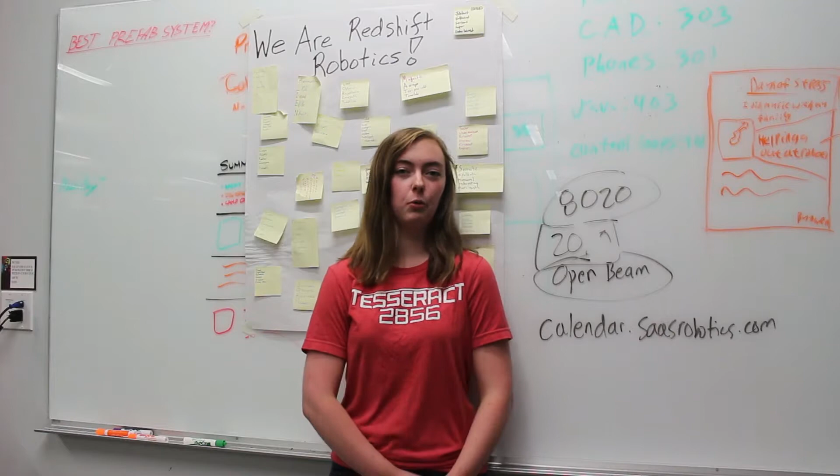This past year, we were the Washington State Champions and Connect Award winners. At West Super Regionals, we were the Motivate Award second place winners, and at the Houston Worlds, we were the Inspire Award finalists. Previously, we made it to Worlds once before, and this last year was our second time at Worlds.

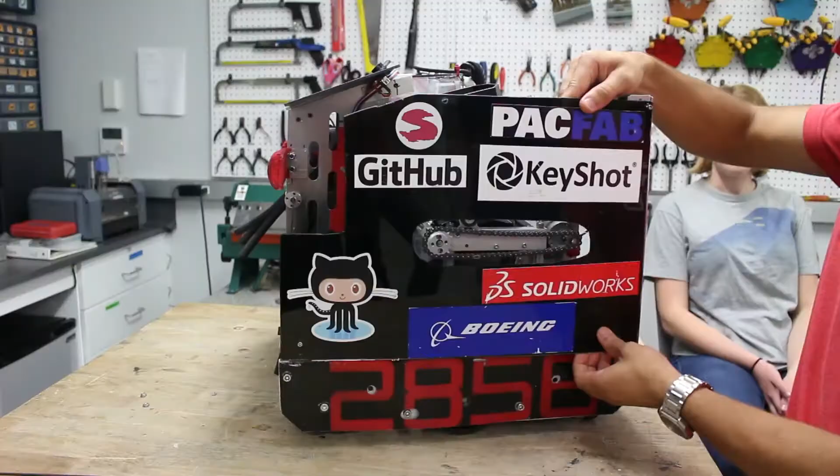Going behind the side panel of the robot, we have a flicking mechanism that is passively fed from the bottom by a second flicker. It's a dual-sided flicker with an adjustable, 3D printed adjustable guide mechanism.

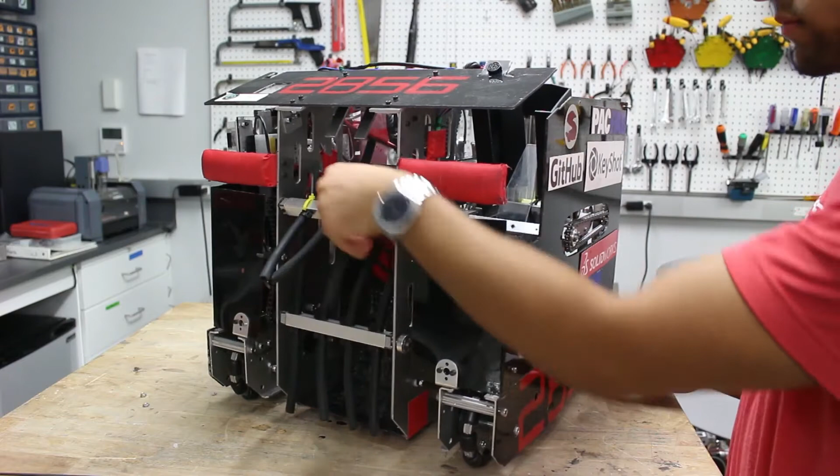Our collection mechanism is two pieces of aluminum square tubing with high-rigidity surgical tubing through them. Our electronics panel has a 3D printed phone mount on a piece of custom bent and shaped polycarbonate, which fits between two pieces of 80/20 aluminum rail, allowing it to slide off and reveal our electronics for easy access beneath.

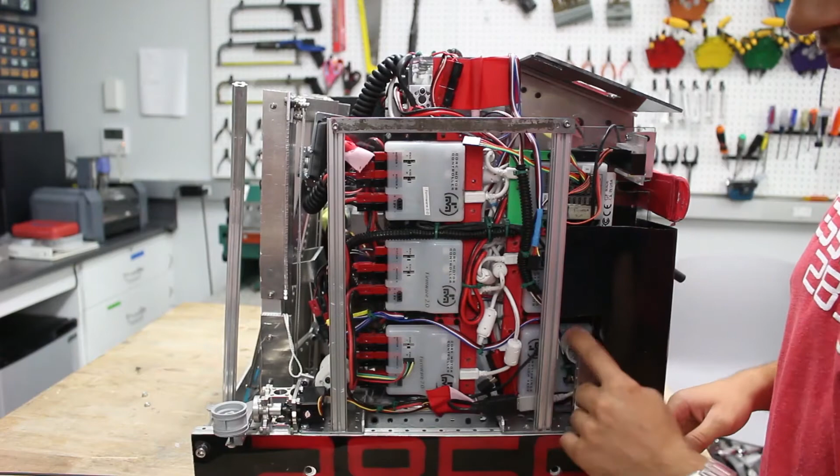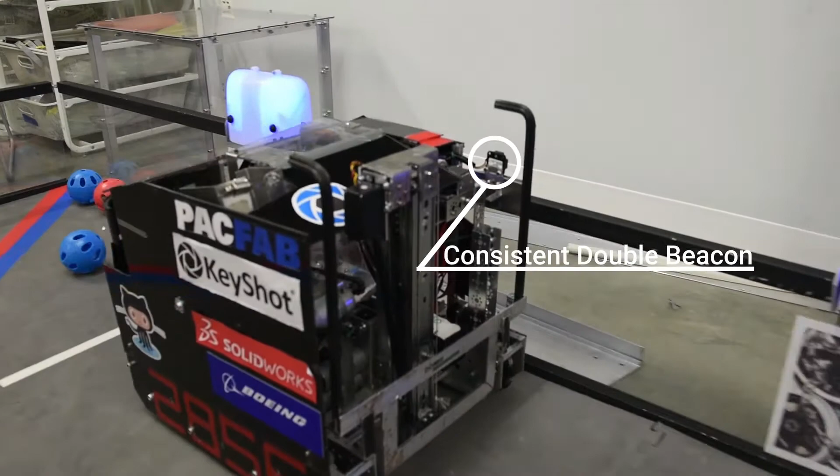On the sides, we have wheels that flip down. This aids us in our alignment with the wall during autonomous, during which we use a combination of these wheels and a PID algorithm that keeps us pressed against the wall at all times, even if we drift away for a small amount of time. With the combination of these two things, it allows us to stay consistently aligned with the wall.

In the rear, we have a cap ball mechanism, made out of Misumi slides attached together with custom aluminum fittings, and two actuated arms that flick out to grab on top of the cap ball.

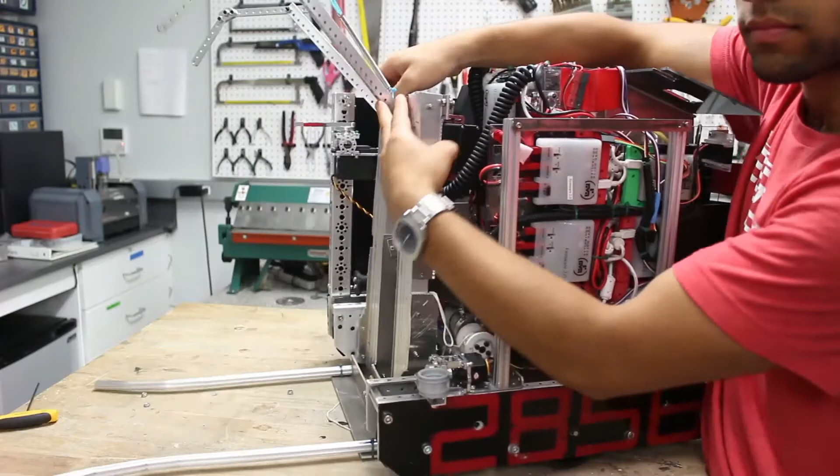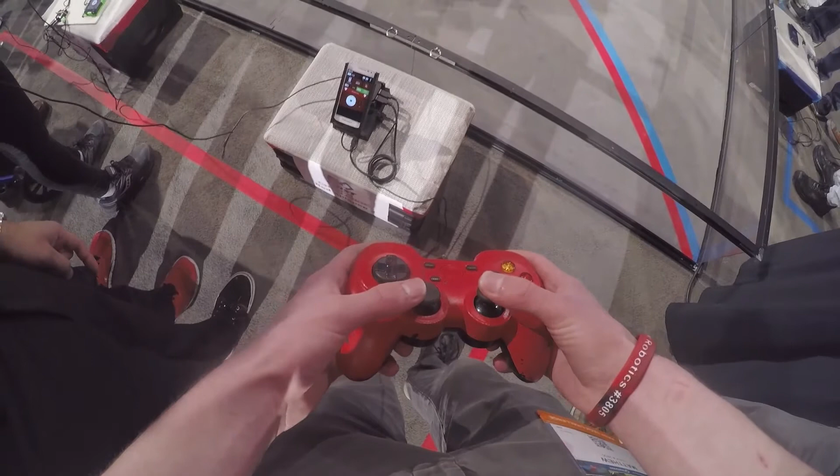Here you can see some in-game footage of it in real life. Of course, when it's powered off, it's a lot less exciting, but you can see it expanding out rather rapidly, grabbing onto the cap ball, and finally lifting it on top of the vortex.

In the front, we have two button pushers on either side of our collection mechanism.

Now, probably the most interesting part of our robot is the passive feeding system. As soon as particles get through the collector, they enter a hopper, which passively drops the particles down. It can hold up to 3 particles, the full 3 allowed. Once in the hopper, those particles pop up and feed through.

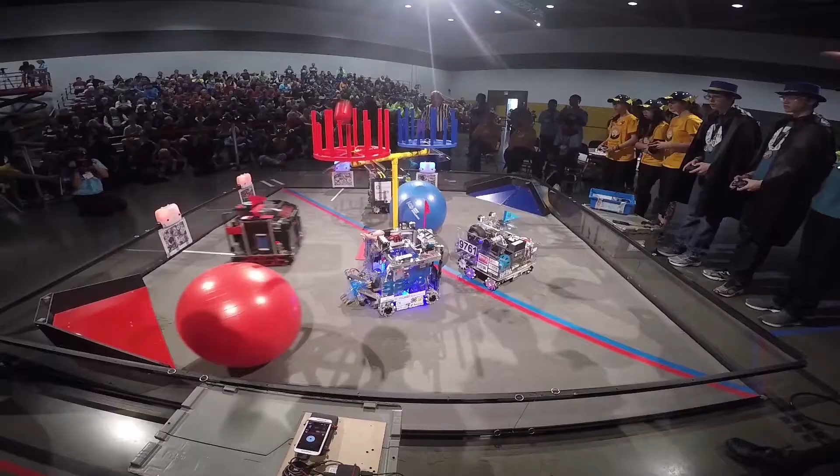As one particle is lifted up by the flicker and loaded in position to flick, the next one slides into place and is brought up by the second flicker, allowing for very fast actuation and rapid fire out of the flicking mechanism, as you can see here. So we get both the benefits of a flicking mechanism in accuracy, as well as speed closer to that of a jugs mechanism.

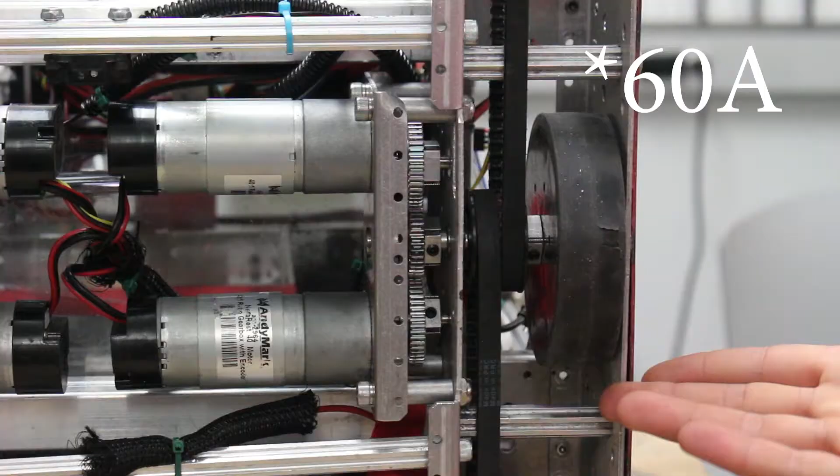For the drivetrain, we are using a 6-wheel tank with Omni wheels. For our middle drive wheels, we have 60A durometer AndyMark wheels. All 6 of the wheels are linked together with a belt drive.

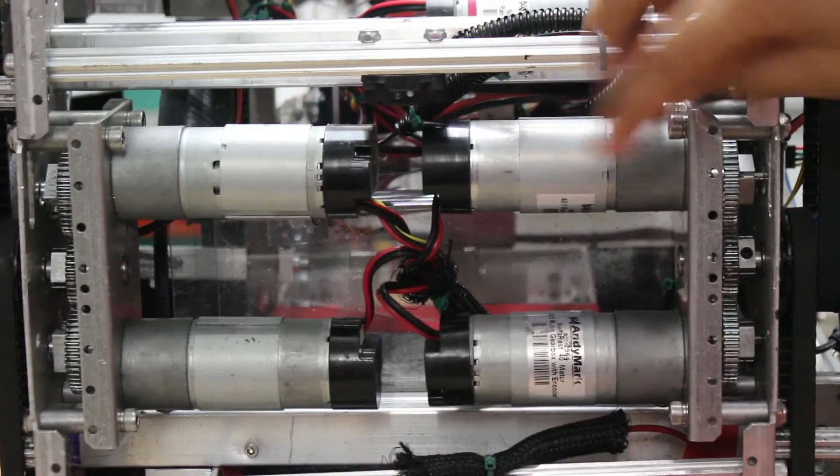Here we have two 40-to-1 motors, slightly geared down in Pico Duo gearboxes on either side, so we get a little bit faster than 40-to-1s. Down here, we have a 20-to-1 motor for the collector, which allows for very quick collection.

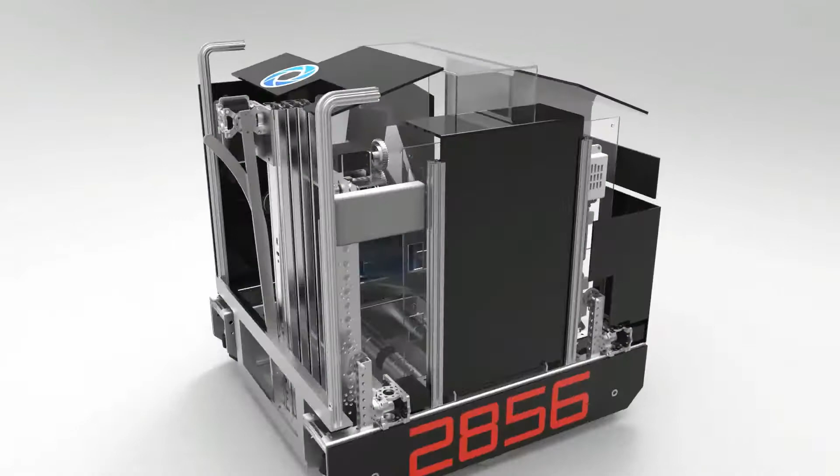We do CAD for nearly every part of the robot. This render happens to be a little bit old because renders are time consuming and we don't render all of our CAD, so this one is from the Super Regionals time period.

Many of these CADed components were then sent out to one of our sponsors, Pacific Northwest Metal Fabricators, where they graciously allowed us to use their water jet machines.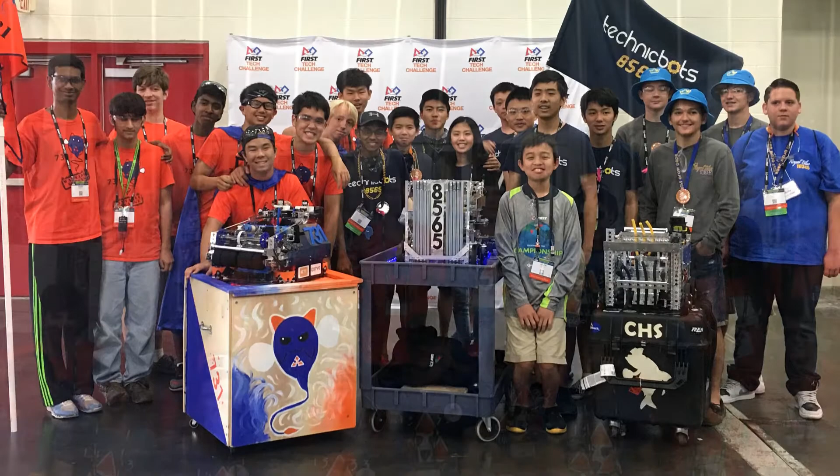Hello, we are Team 9829, Team MAKbots, a First Tech Challenge team from San Antonio, Texas. We are a community team, and each of our members are in different grade levels and go to different schools.

Our team started in 2012 with our three founding members, Michael, Andy, and Christy, who were inspired by an advertisement for First Lego League. We competed in FLL for 3 years, winning many awards before moving on to FTC in 2015.

Our team consists of currently 11 members. Originally, we started out with 3, but gradually, over the years, we gained more and more until our team increased to its size right now.

Our team is divided up into certain sections to supervise different roles, such as programming and mechanics. Our team captain is Andy Lee. Our co-captain is Christy Chen. Our mechanical leader is James John, and our leader in programming is Michael Ning. We have other roles such as leaders in outreach and leaders in multimedia that are filled by our other team members.

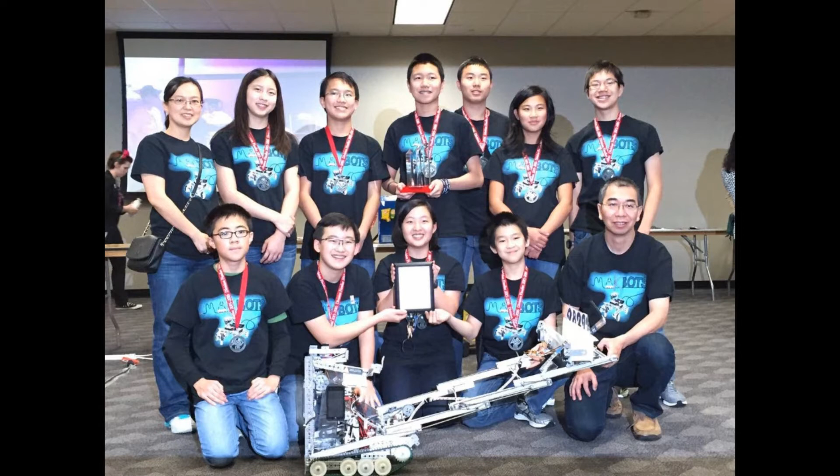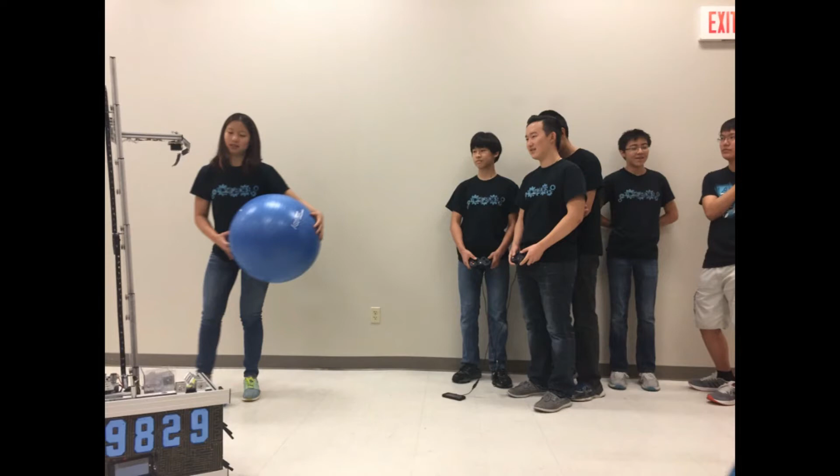Over the years, our team has won many awards. For example, in FLL, we advanced to the North American Open Invitational in Legoland, California in our second year, and in our third year, we advanced to the FLL Razorback Invitational in Arkansas. In FTC, we start in the league competition, and then we advance our way up through regionals, super regionals, and finally to Worlds. We have made it to Worlds in both years that we have competed in FTC.

Our team has had a variety of outreach events in the past season, focusing on different aspects. For starters, we have been consistently promoting STEM in our city, and were given the honor of meeting with the mayor in City Hall. Opportunities like this also give us a face in public and print media, as we have been interviewed on television and in newspapers. In addition, we have many presentations to different audiences.

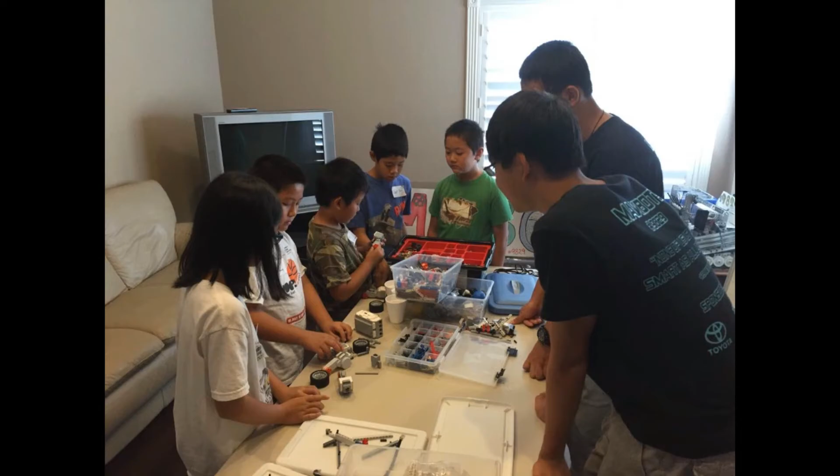Although these are great events, we did more than just bring awareness to STEM. We helped students and their parents engage and interact in STEM. We run multiple camps throughout the summer, in particular the Toyota summer camps and library summer camps, held throughout multiple libraries. Furthermore, we have invited teams in our community to attend workshops taught by professionals, and we have mentored rookie teams in FLL and FTC as well.

We have gone on many fun and engaging STEM-related field trips together. Finally, we participate in community service events, ranging from volunteering at our neighborhood food banks to community environmental care and cleanup hikes.

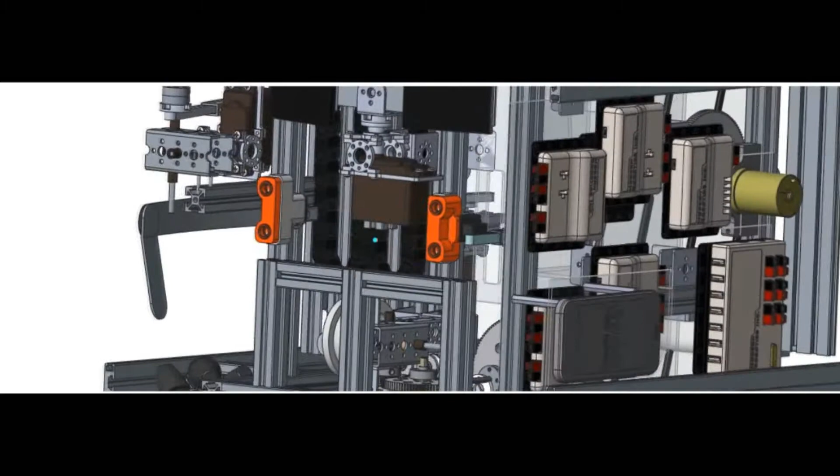The design aspect that was most important is our use of a dual color detection system to precisely detect the beacon color. We also used a PID control system to correct the trajectory of the robot. We also implemented mecanum wheels for mobility.

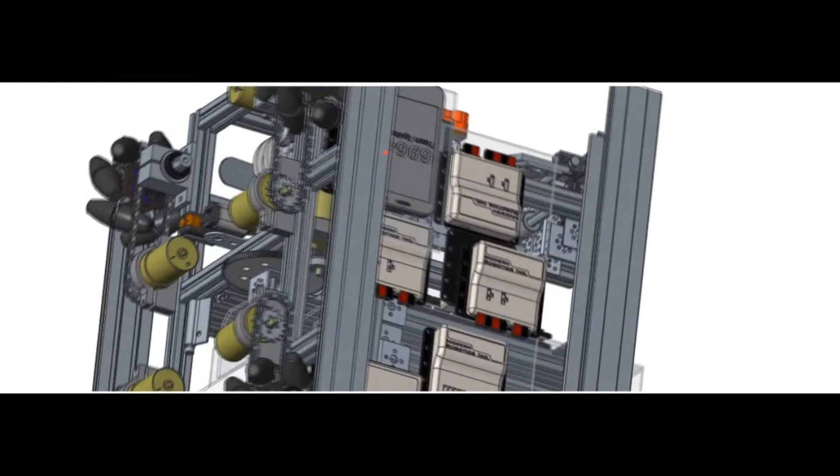Our shooter itself was very accurate. We built it with 2 chambers, one chamber to hold the particles and one chamber to shoot them. Our unique design allowed us to hold many balls at once and also shoot them accurately in both autonomous and teleop periods. We used a 2-tier harvester system made of PVC pipes and tubing that was effective at collecting particles.

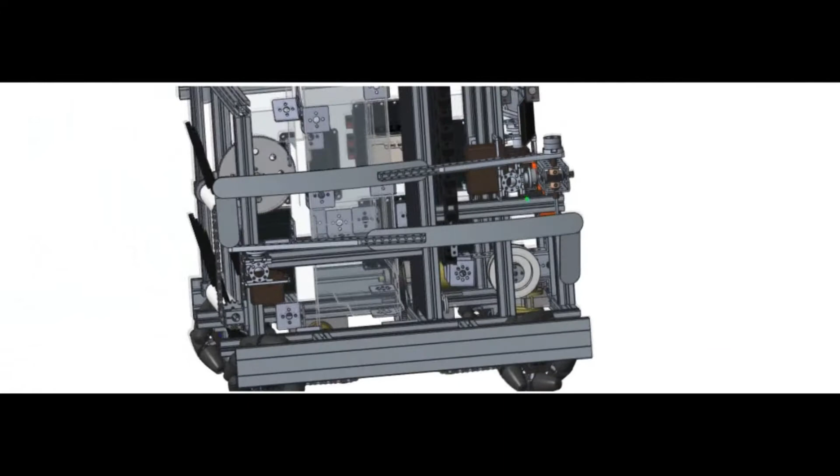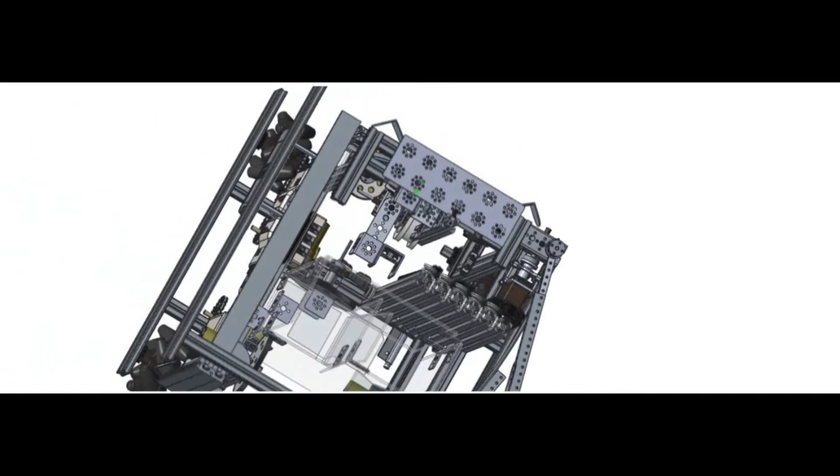The PVC pipes were connected to gears which would spin continuously so that the robot could hold the particles in place and travel with them without losing them. The system was a good fit for the last season because it was compact, efficient, and effective at collecting particles. We were able to store up to 7 particles in a limited area, which allowed us to devote more space to other parts of our robot.

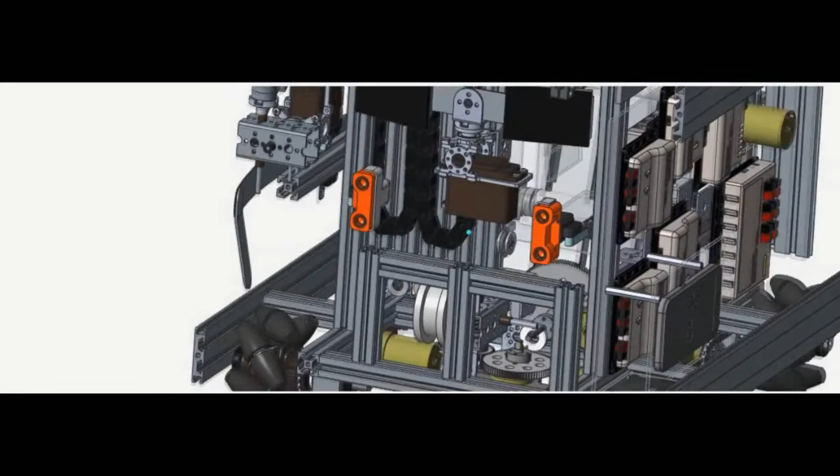The shooter we designed was a good fit for the last season. It was accurate, quick, stable, and secure. It also could carry a large number of particles, and it allowed us to score a high number of particles each game. Autonomous is a very important part of our robot game.

We use a lot of sensors, including color, touch, and ultrasonic sensors to help our robot be more reliable and effective. These sensors allow our robot to correct itself in case of human error or any unprecedented obstacle. With sensors, we have a highly efficient and high-scoring autonomous period that allows us to be very successful in the robot game.